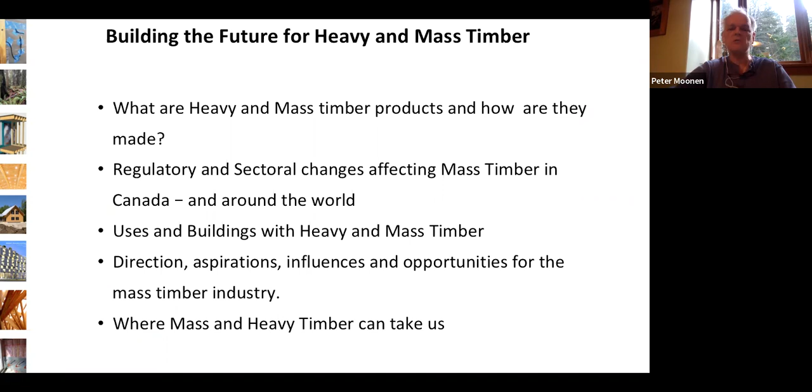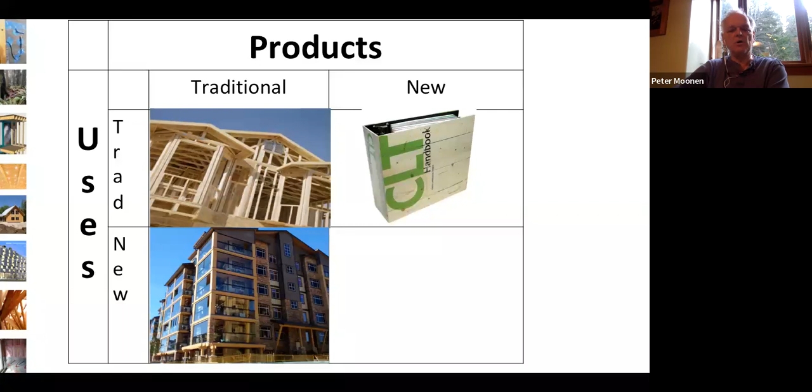Most of us are familiar with traditional wood products, the dimension lumber that goes into traditional uses like single-family homes. Those traditional products are also being used in new types of buildings, whether it's low-rise commercial or mid-rise construction up to six floors. But we also have new products that have come on the market, especially in the mass and heavy timber area, and these can be used in both traditional uses where light frame or concrete are typically used.

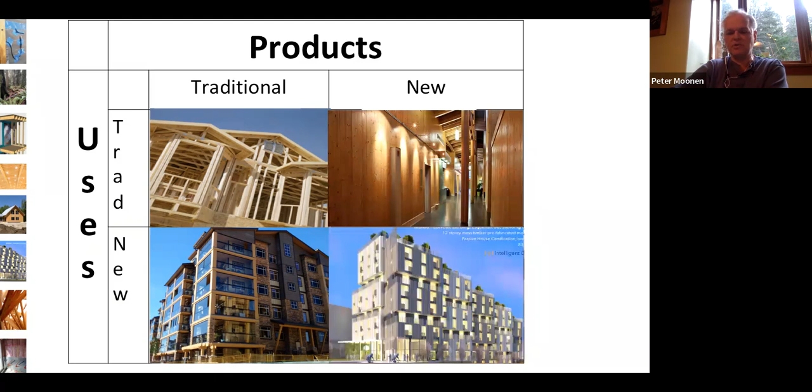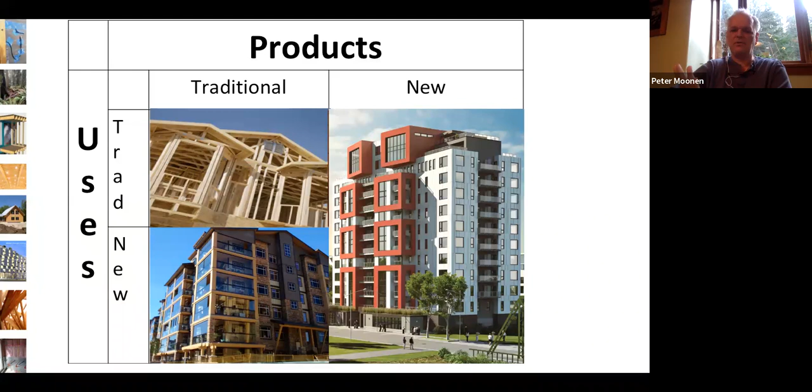Most of us are probably familiar with solid sawn timber or heavy timber. These buildings, we've got a hammer beam design in a cathedral in Europe, and then the projects on the right and left are construction in Vancouver. If you come out to Vancouver and go to Gastown Steamworks, you'll see a 9-story building, which is taller than the mid-rise buildings we typically build. It's heavy timber, solid Douglas fir columns and beams, and a nail laminated timber floor.

So sometimes people say we don't know how to build tall wood. I would argue that we know how to do it. We just forgot that we did.

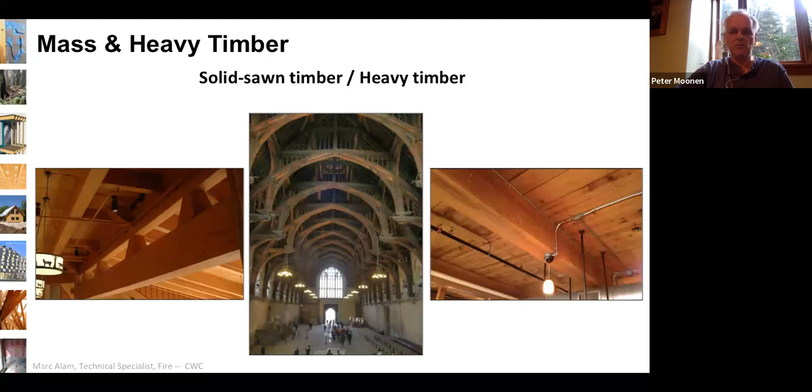So a little bit about different mass timber products. This is nail laminated timber, which was what I showed in the Steamworks photo. It's essentially dimension lumber that is held in place to adjacent pieces of wood using mechanical fasteners, in this case metal ones. We call them nails. It's an old style—I've seen it in ice houses in Illinois that were built in the 1800s. It's very, very strong. It can be used in a single orientation. It's generally supported on both ends. It's not really a good opportunity for cantilever in both directions like some other mass timber products.

Glue laminated timber is a heavy and mass timber product. I'm sure you're all familiar with that.

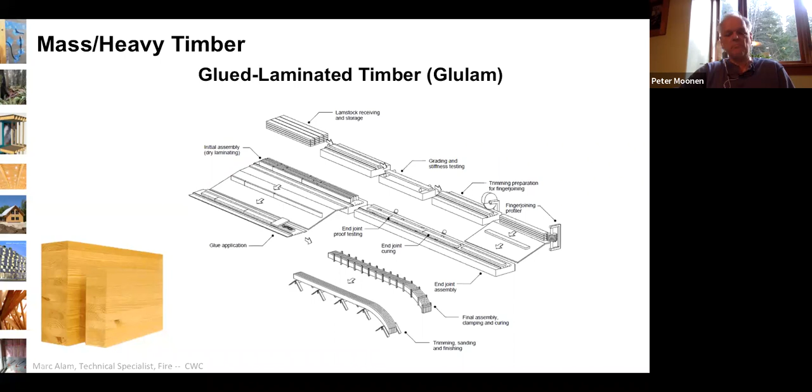One of the great advantages of this is that you can use less wood than with a heavy timber product, because the defects in a piece of wood are offset by the wood above or below. So you're basically trapping a defect among solid wood. This is a way to build up heavy timber elements and get better use out of smaller pieces of wood.

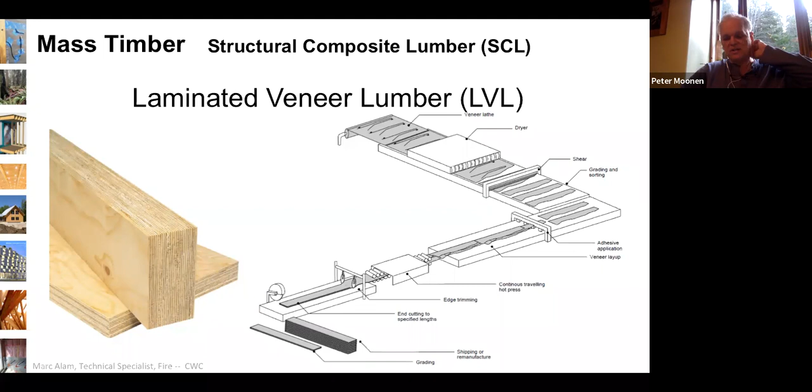Laminated veneer lumber is a single direction oriented veneer. The veneers are the same as are used in plywood, but they're oriented along the length, so the span is parallel to the orientation of the grain. In plywood, those same veneers and the same resin would be oriented at 90 degrees. Plywood is limited in its size because of that cross lamination of veneers. LVL is a continuous process, done in long, continuous billets.

Continuous billets are also the process typically for laminated strand lumber, where you take thin strips of wood, use a resin, and produce a long product.

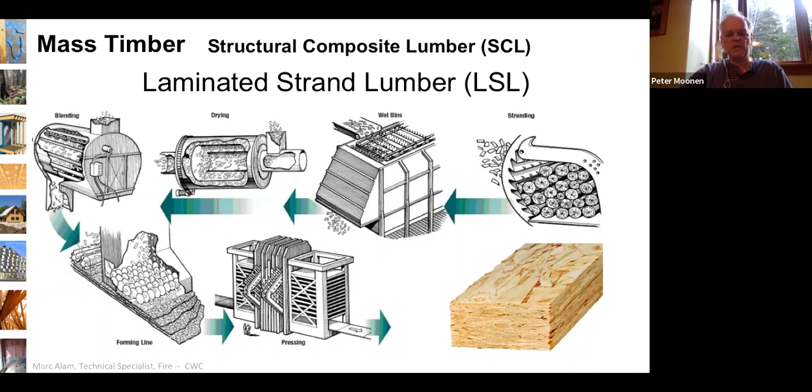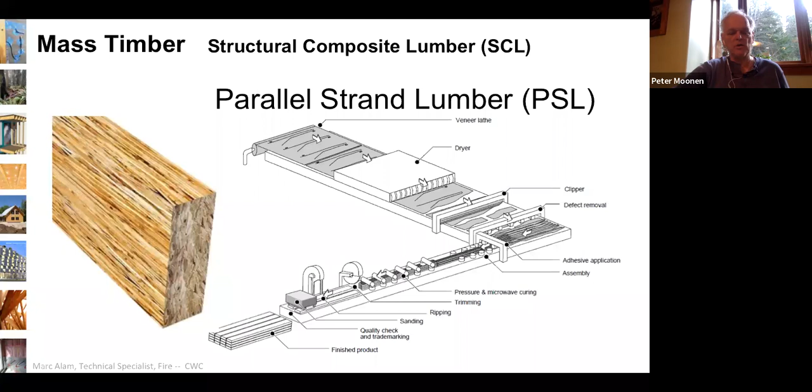Parallel strand lumber, known here in Canada as Parallam, was invented in Vancouver, and is the strongest engineered wood product that is commercially available. It takes the same thickness of strips as are used in plywood, and then uses a phenolic resin, and under pressure and heat it is extruded into a long billet, again a continuous process, but the billets are typically cut off at 64 feet and then remanufactured into smaller elements. This product can also be glued, as can LVL and LSL.

Cross-laminated timber is sort of the poster child for mass timber. It's a fairly simple product that can be versatile in size and thickness. It's just dimension lumber that is machined to have good glue surfaces, oriented at 90 degrees to the layer above or below it, and glued in place under pressure, sometimes with side pressure.

It's a really good slab product that can be used in shear applications in walls. It can be used to support gravity loads, and can also be used as a slab or as a floor. It is typically not used to replace light frame — it's used to displace other materials like concrete, precast or tilt-up concrete.

There are a couple of other fairly new products on the market. Dowel laminated timber is the same process as nail laminated timber, but it uses wood dowels, which allows that panel to be machined. There are two manufacturers in Canada, one in Golden, British Columbia, and one in Abbotsford. And when I say machined, if you want to create a window or door opening, you can just cut the piece out and not worry about the nails damaging your cutting edge.

The other, only made in the United States, is mass plywood panels. This is one of the strongest and most stable because it's using an engineered product, plywood, and then it's built up into large panels. This can be used like CLT, either as a horizontal slab or as a vertical gravity or shear support. So those are the typical mass and heavy timber products for which there are increasing opportunities.

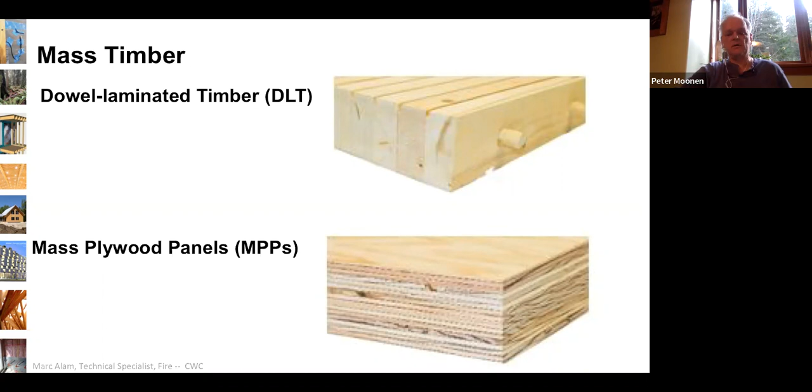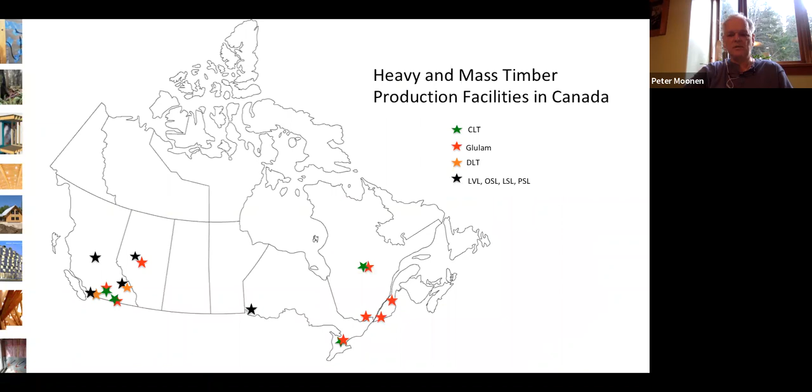So here's just a map showing some of the production facilities. There's very little in central Canada, but there's also very little market there. British Columbia and Quebec are growing. I would like to see a few — I'd like to put a few stars in the Maritimes, but that's an entirely different issue.

So there's lots of things happening in our design and construction world, and I'm going to talk a little bit about some of those. These are issues or opportunities for heavy and mass timber for which mass and heavy timber have solutions. We'll look at the topics I'll cover: regulations, the construction sector and some of the issues it's facing, wood product, housing, healthy buildings, and design for construction. I'll go through each of these, and I hope you'll start to see why they are interconnected.

But we'll start with the international aspect around carbon.

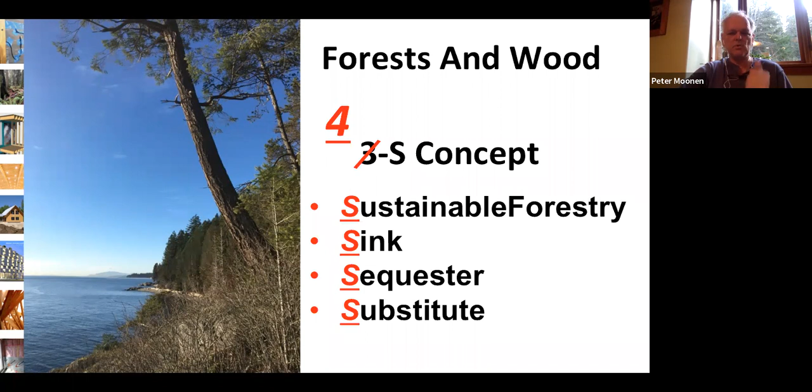Typically, when we talk about wood, we think of it from a 3S point of view: the forest is a carbon sink, wood can sequester carbon, and wood can substitute for more carbon intense products. But it actually needs to start with sustainable forestry, so that's the 4th S.

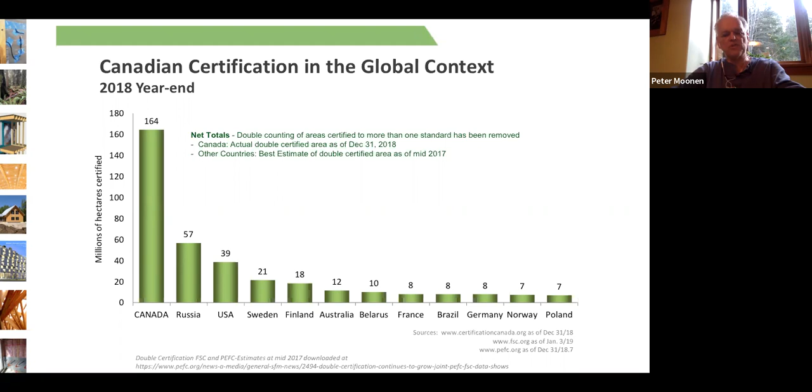The Canadian Forest Service has developed a carbon budget model, and they use that for reporting total emissions. Under COP15, COP21, and COP26, there were requirements for countries to report carbon emissions and carbon reductions. So in doing this, the Canadian Forest Service, in trying to calculate our forest emissions, has also looked at the best ways to reduce emissions and perhaps try to do some mitigation work.

You can see that there's no single solution. It's not just don't cut down trees, and it's not just cut them all down and use them in buildings. There's a mix that includes some bioenergy to displace fossil fuels. It doesn't do any good to use bioenergy to displace electrical grid electricity. Designing products that can last longer - that includes structures. Harvest a little less to have better utilization of that forest resource. But the best option was actually a bit of a mix of all of them.

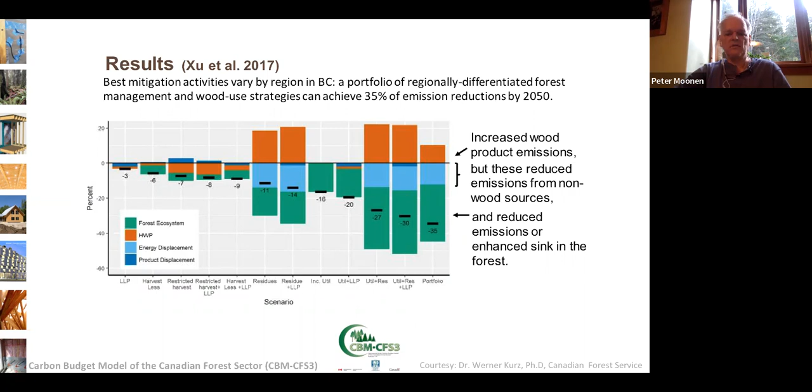This is a study that came out a couple of years ago. You'll find that the net benefit sometimes involves things that are counterintuitive, like having increased product emissions, but you also end up having various reductions in the total carbon impact of the forest in Canada.

So the federal government has a greening government policy. They were early adopters of the Pan-Canadian framework. The Net Zero Ready Energy Code is supposed to be coming out this year. British Columbia has procurement documents. There's international agreements around procurement, all of them to basically come up with a low carbon, sustainable, and climate resilient built environment.

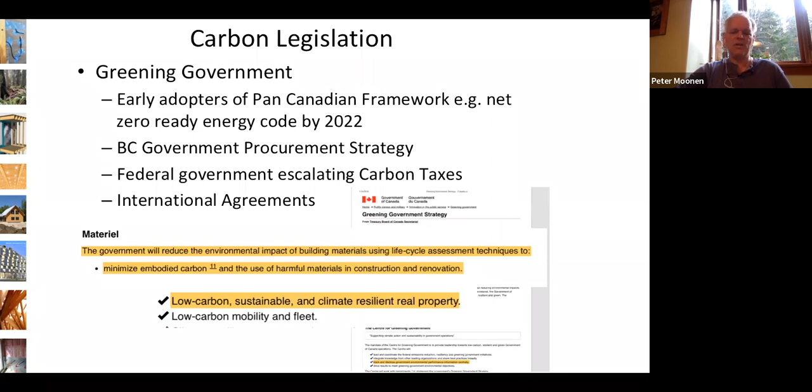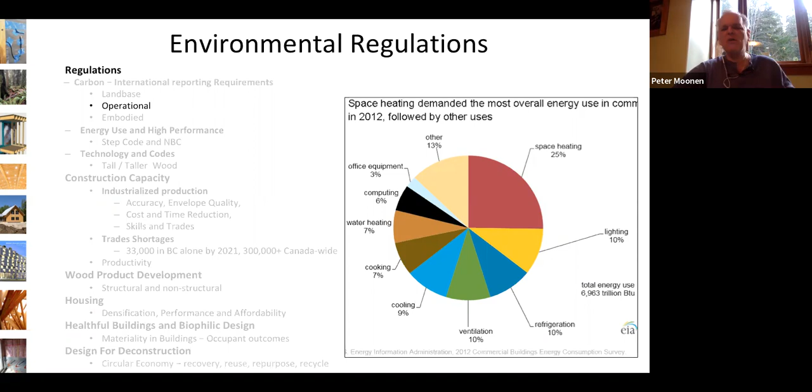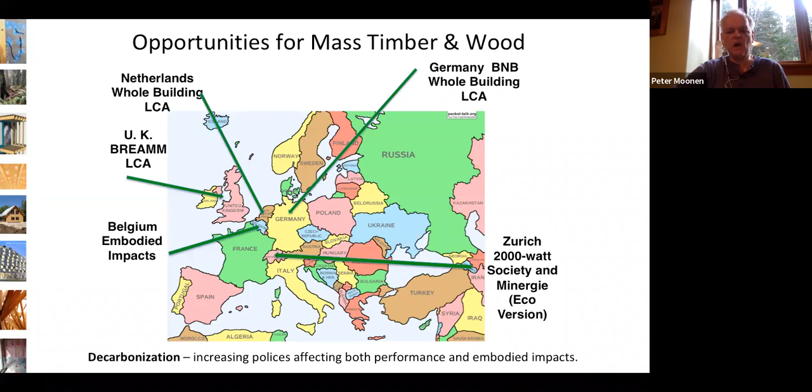Increasingly, though, we're seeing that the embodied impact of buildings is both having attention paid to it, but also being incorporated into regulations, especially in Europe, where most of the countries there have recognized that there is some impact from the embodied emissions associated with construction, and that we need to find ways to reduce that. One of the best ways to do this is life cycle analysis, evaluation of materials, whether whole building LCA or just focusing on embodied impact. But all of these are designed to decarbonize the built environment from both a performance and an embodied method.

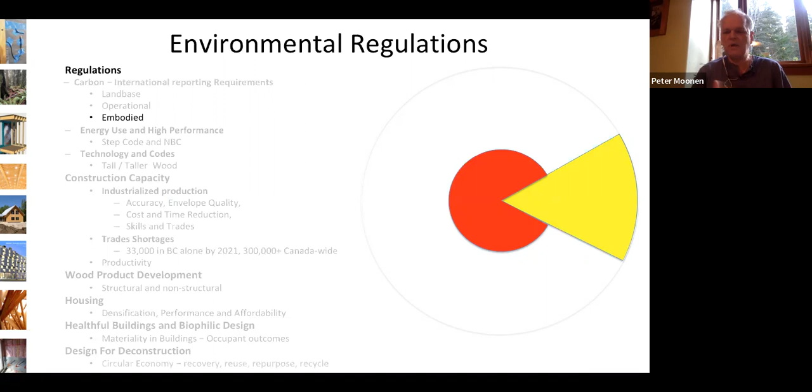Embodied impact is often undervalued, and I'll get into this a little bit down the road when we talk about high performance. But typically, embodied impacts are associated with the materials. When it comes to wood, there are several areas of opportunity.

But if we just have a conventional forest, a natural forest would have an increase in carbon, and then at some point, more carbon starts to emit from forests than is uptake. Forests are sort of like people - they start off small, they grow quickly, they get tall, and then they get big around the middle, and then they start to die. So while an old forest may have lots of wood there, it has also had lots of trees that have grown and died. So a forest reaches a stasis when it comes to carbon.

A way to increase that carbon benefit is to start having products that last a long time, typically buildings. So where the forest is a carbon sink, the buildings and the long lived products are sequestered carbon. But the big impact as well is in avoided emissions, by using, where you can, materials that are less impacting and displacing those that have a high impact. Now, I should say there's no such thing as a perfect material, and we need to understand the impacts of our materials and where we can merge them together.

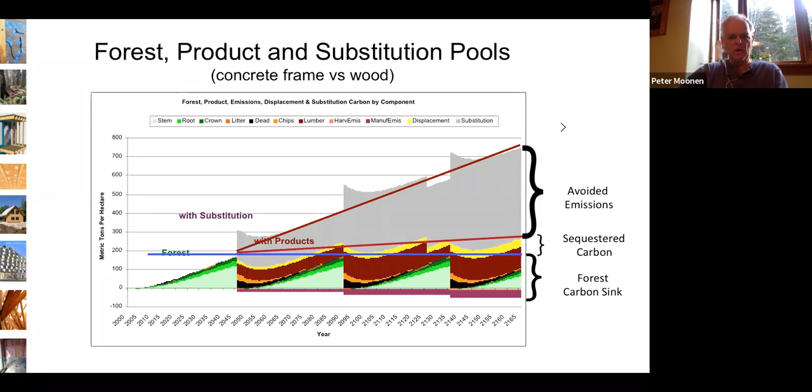As an architect or an engineer, I think it's your obligation to understand the impacts and the benefits and the uses of every material, and more importantly, how to integrate those. And if you do that, you have a much better opportunity to have low impact.

So getting back to operational LCA, I mentioned earlier that heating and cooling is about 25%. This LCA was done in Australia, and they found that the embodied carbon over the life cycle of the building was 35%. But when you look at this, you see that 24% of the impact over the life is in heating and cooling, and that is where we put our regulations. We don't have a lot of regulations around how much energy you can use for hot water, refrigeration, or cooking. So when you consider that what we regulate, the heating and cooling, is about two-thirds of the embodied impact in this particular LCA, it gives you some pause to think, well, maybe we do have to have some understanding of the embodied impact of our material and building design.

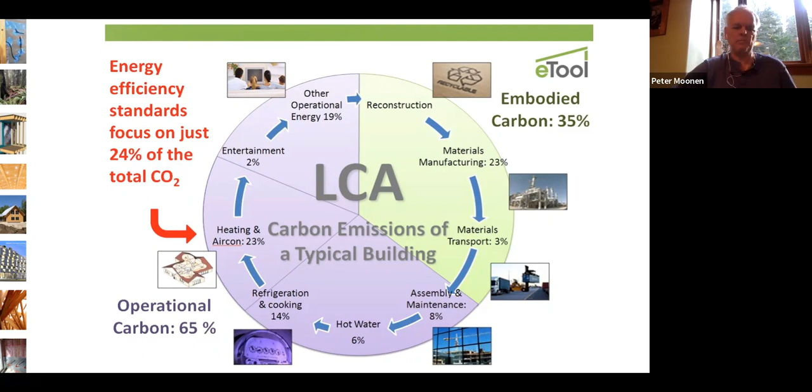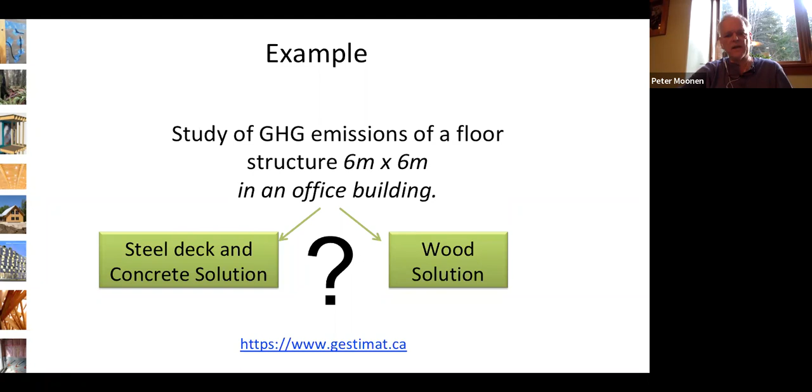There was a tool that was developed in Canada for the Quebec government to look at this. What are the impacts of our material choices in construction? The tool is called Gestimat. You can go to gestimat.ca. It's free, and it allows you to input your building design using a typical construction or even a material takeoff for the structural elements. It doesn't include the building envelope. It doesn't include the furnishings, the fixtures and stuff. But what it does look at is actual construction systems that are typically used in the built environment.

So for example, if you're looking at a typical steel, open web steel truss, steel deck, rebar, and concrete, the data from CIRAIG would give you, you would input the quantity of materials, the nature of the material. Is it 50 MPa? Is it 20 MPa concrete? And it tallies all that up and comes up with a kilogram of CO2 equivalent for each assembly. And then you total up all the assemblies you have in your building, and that gives you your base.

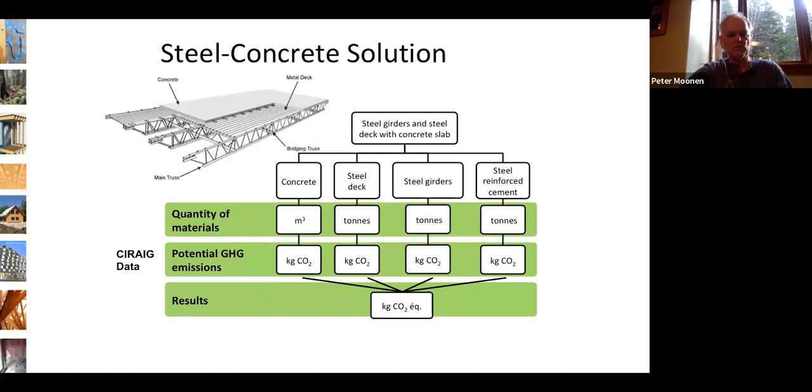This is not an LCA tool, it's an LCA compiler, with an emphasis on carbon. So that's something you can look at and say, oh, if I go with this system, or if I use these kinds of materials, if you're building, say, a 22-story building or a 2-story building, you can look at the different scenarios that you might consider, input that fairly straightforward, and then come up with an impact evaluation. And to be honest, if the systems that you're looking at are within plus or minus 2 or 3%, it's a wash. But if you look at one and go, wow, this system is 26% less than this system, maybe it helps you direct to the kind of choices or systems you can look at.

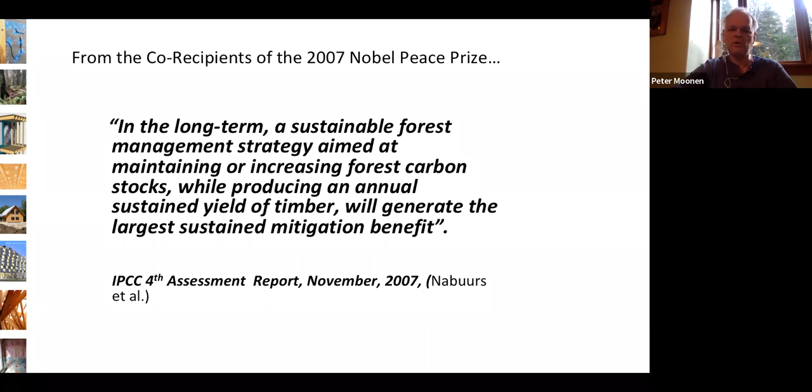Ultimately, when you combine embodied and longevity and forest, here's what the IPCC said, and has said 2 or 3 times now, in 2007, 13, and 19. Essentially, we have to grow more forest land. We have to increase the growth of plants on that forest land, and we have to use lumber from that increased forest, and that will generate the largest sustained mitigation benefit. This was not just in building materials. This is the way to have the largest sustained mitigation benefit that is controllable by man. We can't necessarily control what the ocean's carbon uptake is, but if we can increase our forest land base and use more sustainably harvested wood, we can start to mitigate that.

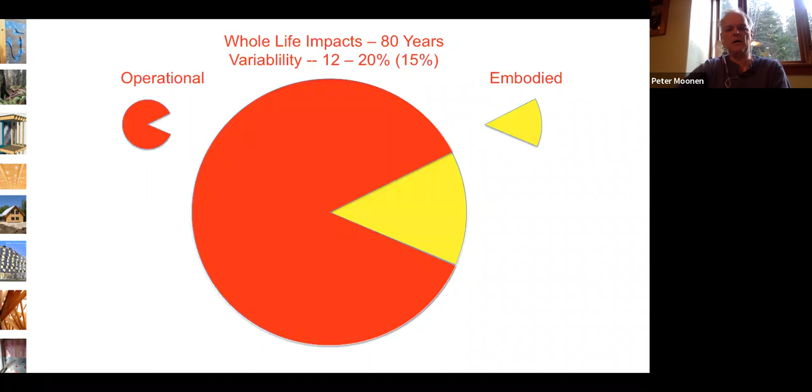So let's look at now the impact of performance and embodied. Typically, the embodied impact is between 12 and 20%. Those are the figures the U.S. Green Building Council has chosen or has determined. So in year 0, I've chosen 15% as a middle ground. In year 0, all of the impact associated with that building over its lifespan has been embedded. Those embedded or embodied impacts are done. Can't undo them, they're gone.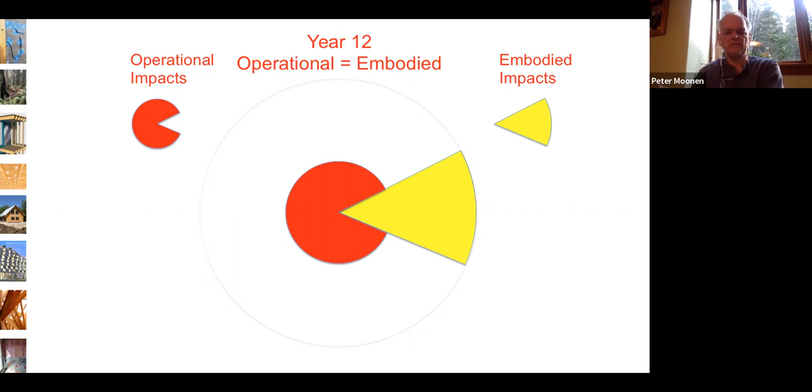Over time, as you add operational impacts, year 1, year 5, year 10, if you have an 80-year lifespan for your building, at year 12, the embodied impact and the operational impact for a building that has a 15% embodied impact are equal. And after that, the operational impact surpasses the embodied, clearly. However, we can't always predict what's going to happen in the future. You may have an exceptionally well-maintained and operated building, which reduces your operational impact. You may also have very poor operational performance. You may change, the land value may change.

You decide, hey, I got a 3-story building here and the land value went up. I can sell it and make a lot of money. The building may be perfectly good, but we don't need it anymore. We don't want it anymore.

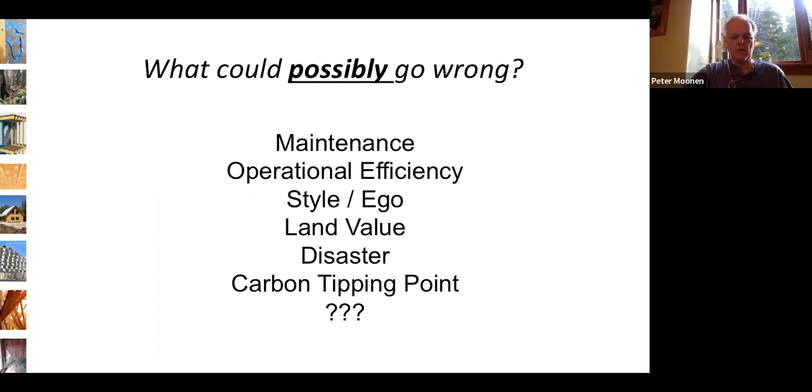So the future is unpredictable. That's why I think we have to pay attention to what we're doing today, because those impacts are definable and they're complete. We can't undo those.

In fact, some work done out of Quebec by Annie Levasseur has indicated that if we save a ton of carbon today, we don't have to save 4 tons going down the road in 80 years. So just like interest in a retirement plan, you hope that the savings you gather by putting in $100 a month or $300 a month will accrue so you have more money down the road than you put in. Carbon impact and carbon benefit accrue over time because the carbon dioxide in the atmosphere lasts a long time.

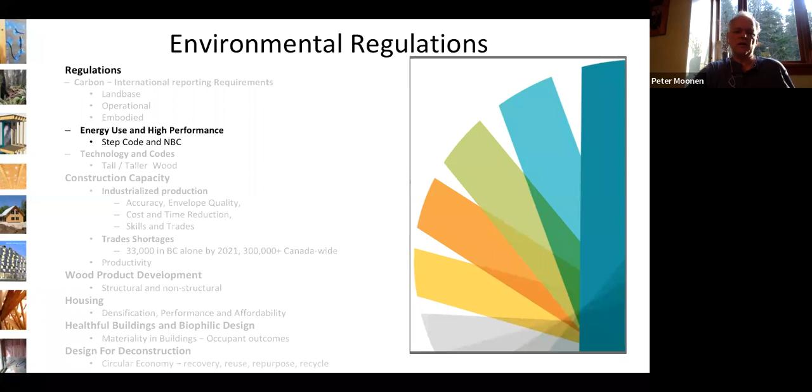So looking at energy use and high performance, this is a project—I actually have a completed photo that I neglected, I'm remiss in not putting in there. This is only a 3-story building on a 24-foot wide lot. It was built in North Vancouver. It's heavy timber, it's mass timber, and it's light frame. The front panels are all light frame, built to BC Passive House standards.

It is a passive house building, very low energy consumption. The back wall is CLT, and the floor plates are CLT, and you can see the beams are supported on columns. So it's heavy mass light frame, high performance building with a restaurant and a CLT fire separation.

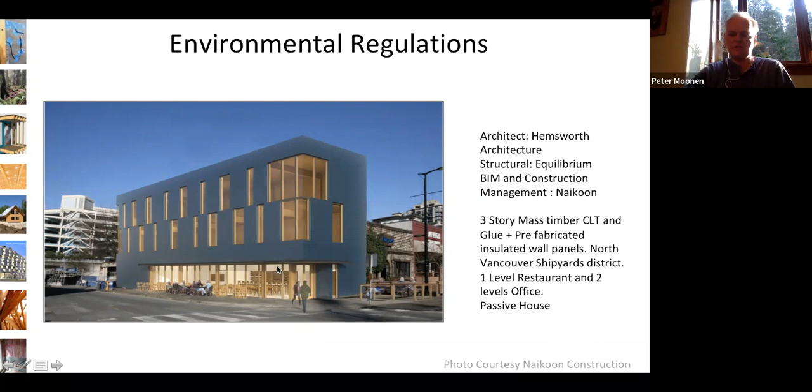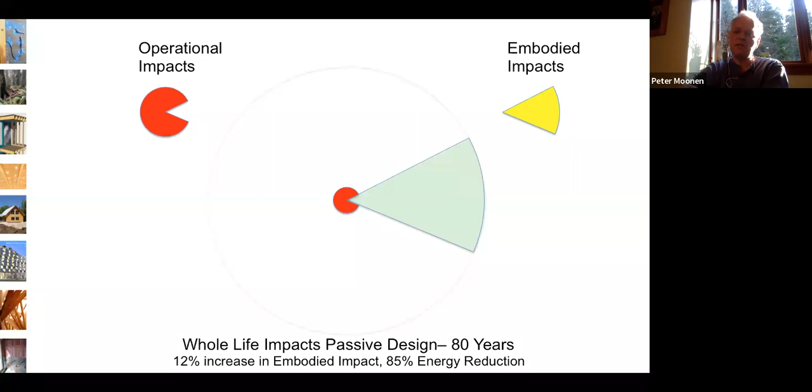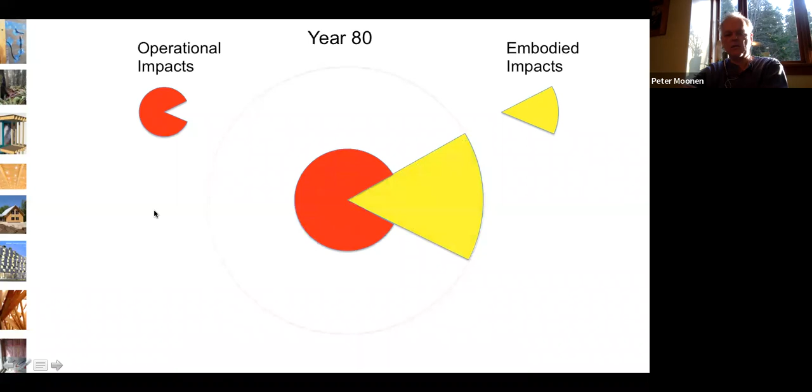But then you also have a much lower operational impact. So in year 1, year 5, you've got all of these impacts, year 30 and year 80. Over time, the embodied impact and the operational impact accumulate. But in this case, the embodied impact remains at 54% compared to 46% operational with high performance.

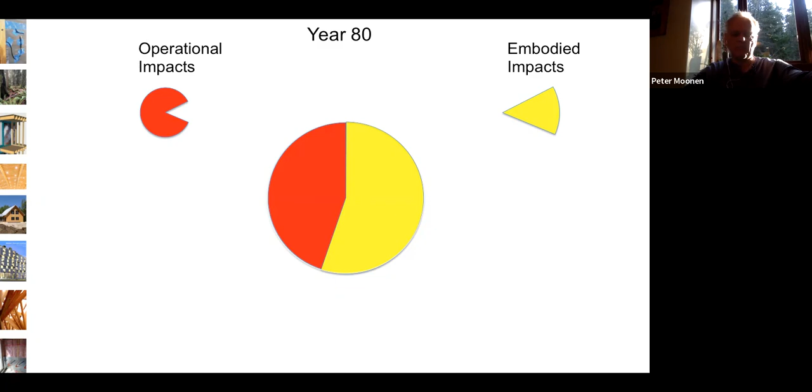So I think it's important to consider that we need to focus on both performance and embodied impact if we're really going to make a difference. And this is if the building had been a conventional performing building—it would have been about 3 times the impact total.

So other opportunities coming about are resulting from both technology and codes. As we increase our understanding of heavy and mass timber, I think we're able to better understand what the wood can do, what different systems can do.

Codes don't just change because you've got a lobby group that wants it to change. You have to demonstrate proficiency, capability, and competency. And that technology enabled a better understanding of what is possible for wood.

As a result, we're going to be seeing significant code changes, and provinces will adopt at their own pace. But the 2020 National Building Code is going to be a tremendous opportunity for those who want to use heavy mass timber. It will allow buildings up to 12 stories, with encapsulated mass timber construction, not exposed wood, adopted or adapted by each province. Quebec has different allowances for exposed wood than British Columbia does, for example. But look for the codes to change to allow mass timber.

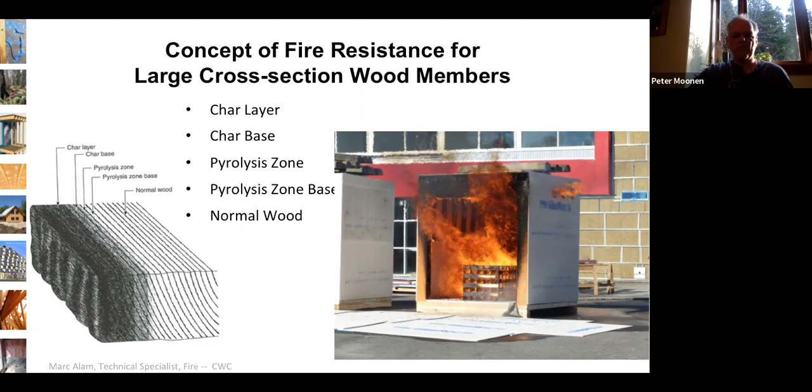That's what has to be calculated to allow for a 2-hour fire rate. It's how much wood do I need after 2 hours to support the structure.

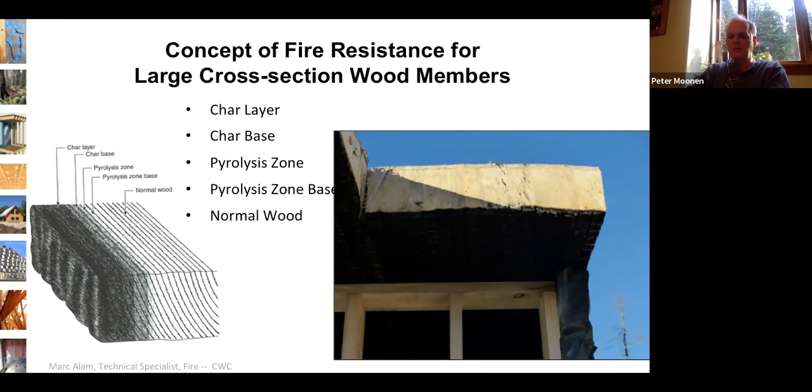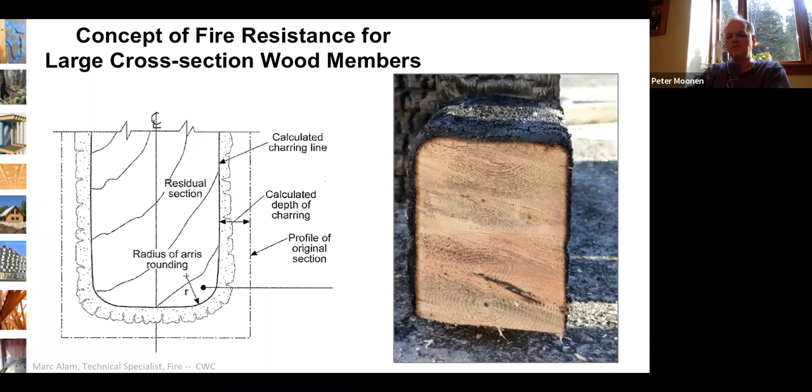This is a picture of a fire test that was done, demonstrated at the Surrey Fire Training Center. It's a heavy and mass timber, dowel laminated timber roof and heavy timber columns. You can see the dowel laminated timber had some charring, but most of the DLT remained solid. This is the glulam column that was burned - it had about 5/8 of charring after an hour and 15 minutes of fairly intense fire.

So the codes are going to be based on demonstration of performance capabilities. So we're going to shift gear now and look a little bit at construction.

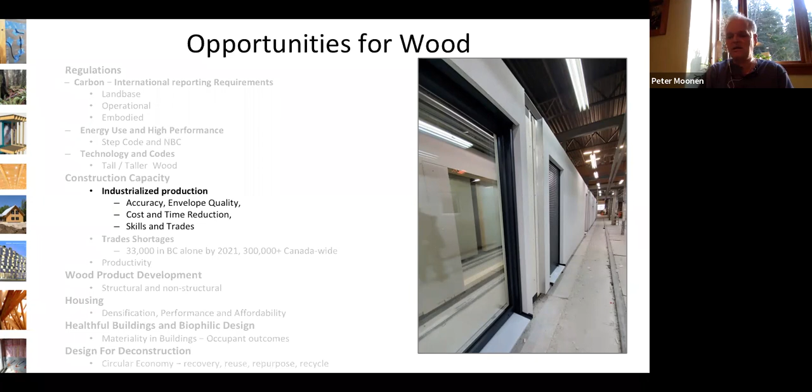These panels on the right are from a company called Elk Fertighaus in Austria. They are light frame panels that are completely prefabricated and shipped vertically. They include windows, doors, electrical, some mechanical ventilation, cladding on the outside, gyprock, and even paint on the inside.

This is a passive house building in Whistler. It was a heavy and mass timber building. It went up in a couple of weeks. It was a 3-story building that was supposed to be insulated concrete, but the concrete could not be poured and cured because of the timing. It was in winter, and the owner needed this operational by May.

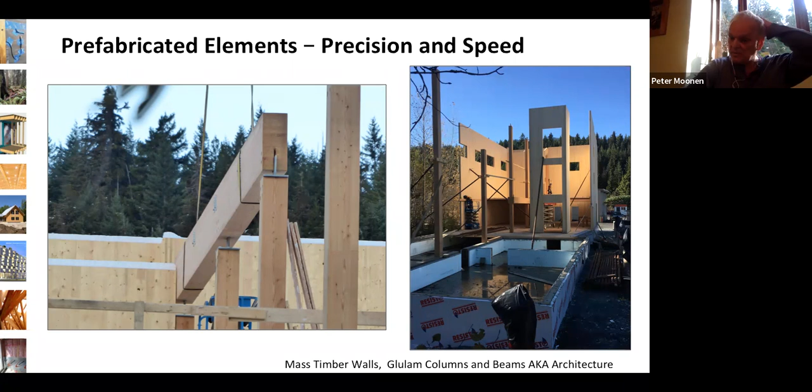Whistler is a cold place in the winter - lots of snow, as you can see. This was in late October, and the building went up in 3 weeks and was all prefabricated components.

One of the other things we're dealing with respect to construction capacity is a shortage of trades. Most of you probably know Mike Holmes, but there is a real shortage of qualified trades in our construction sector. In British Columbia alone, 33,000 trades jobs are going wanting. And that includes everything from formwork, rebar, electrical, plumbing, mechanical, envelope, you name it. There are trade shortages, and it's not just in BC, it's everywhere.

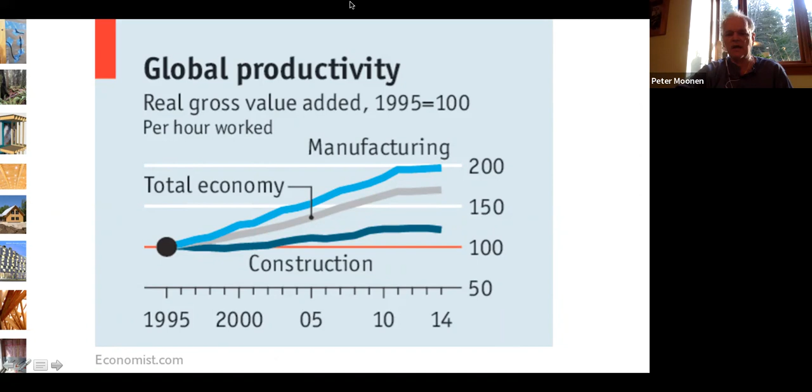That affects productivity. But productivity in the industry has been fairly low over the last 75 or 80 years. You can see this chart just shows the lack of productivity that has plagued the construction sector. It's not pleasant for them. You look at the gross value added per hour worked, which is another measure of productivity - it's fairly low. Even in some countries, agriculture surpasses the productivity of the construction sector.

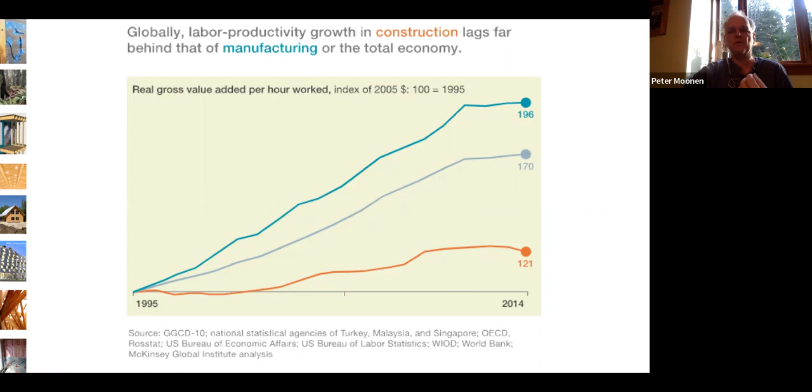So what is this leading to? It means that companies have to become more productive, and that is going to mean off-site construction. It's going to mean prefabricated elements. It's going to mean well-trained trades, understanding how to do their job within the confines of a prefabricated system.

That doesn't mean prefabrication has to be boring. Lots of things are prefabricated. What's the analogy that was used at a prefab session that we had here in British Columbia about 3 weeks ago - you'd never buy a car by having all the parts show up in your driveway and have to assemble it yourself. So buildings are complex systems.

Quite often, though, a lot of buildings, especially in the single-family home sector, the raw material shows up, you have to piece it together on site and figure out what to do with whatever you couldn't use. That is going to be changing as we have fewer trades who can do that. So we're going to be moving to prefabrication - mass timber, heavy timber, really, really well suited in those areas.

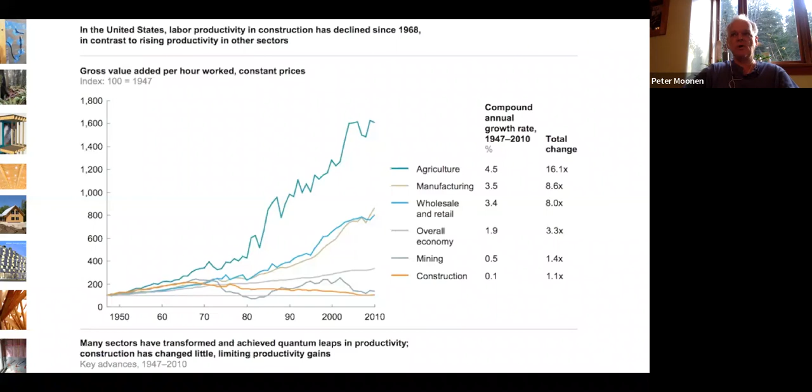So why is prefabrication an important and good opportunity for wood? We have changes in technology and development. We've got new resins, we've got new software. BIM is something which is just becoming a natural part of your world. The wood sector has embraced that as well.

We've got direct to machine technologies so that the engineer can transfer the information directly to the machining tool. In this case, this is a CNC machine that is going to be processing a CLT panel. This all increases productivity. It also increases accuracy and installation ease.

You can imagine that pieces that are really well cut and well designed are able to go together to create strong, tight, and well-performing structural systems. Wood is very well attuned to being processed to very tight tolerances, to a fraction of a millimeter. Other materials are either difficult to machine or can't be machined to those tolerances. This is why it's important to understand what you need in the building and what a particular material can deliver.

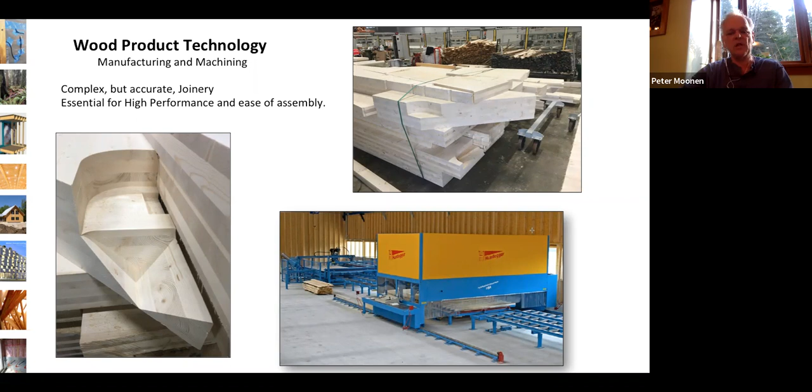The precision and the requirement for precision, and the ability to deliver that, is a real opportunity for heavy and mass timber, especially as we get to bigger buildings, whether taller, larger span, or higher performing buildings where the wood acts in a thermal capacity, reducing the amount of insulation. These are all opportunities for heavy and mass timber.

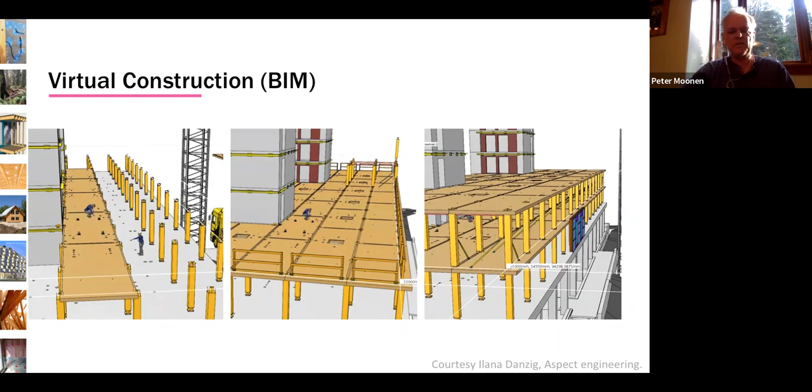I managed to get some shots. This was some of the virtual drawings from the Brock Commons project. Every single structural component, every piece of rebar, every bolt was input into the software, and then the building was virtually built. They did it several times just to see what the best placement of crane positions and people was, and what the order or sequencing of installation should be. All of those details were worked out before the building was even started, and that's a real opportunity. This software enhances the ability to use wood.

I'm not sure how it is where you live, but increasingly cities are getting denser. In some cities like Vancouver, the city is constrained on 3 sides by water and 1 side by another municipality. They have no more land, so if they're going to densify, they have to go up. At the same time, there are expectations on performance imposed by the province and the city, and there's a real demand for affordability. How are we going to do all of that?

The Vancouver Affordable Housing Agency is looking increasingly at wood because of its speed of construction, and also because there's a sweet spot where it is competitive, or more competitive, than concrete, depending on the nature of the design. They're increasingly looking at it as a solution.

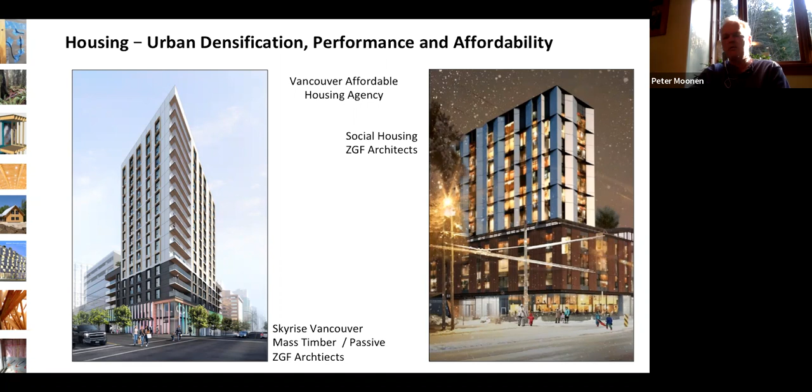The building on the right is probably taller than currently allowed under the codes, because it's on a concrete platform with 12 stories on top of that. But that building could be an all mass timber building, and that would incorporate social and affordable housing, as well as commercial and mercantile uses.

What are some of the typical uses? In mid-rise construction, it's not uncommon for mass timber elements to be used in the elevator shaft. It reduces the differential shrinkage between two different materials like concrete and wood. It also has good fire resistance capabilities. It can be pre-manufactured and dropped into place, or it can be site built, so it's very versatile. On the right-hand side is a CLT elevator shaft, I believe this was in the Crest building in North Vancouver, and was 3 stories high, built as a box and dropped into place with a crane.

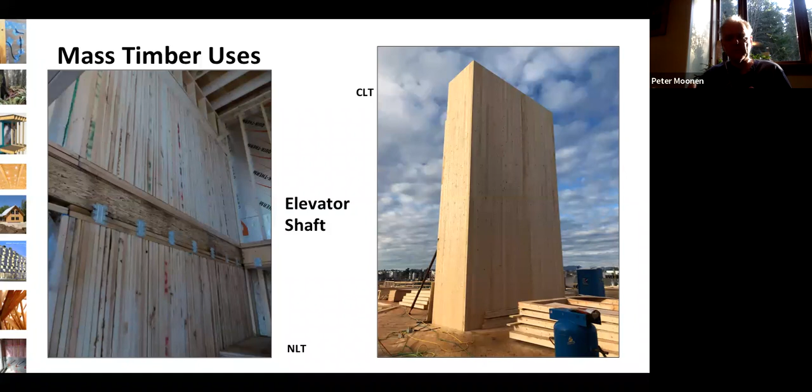Heavy and mass timber can also be used in hybrid construction. Several projects now are moving to use light frame construction for the vertical elements, the prefabricated walls, on which they drop a 4 meter or 3.5 meter by 10 or 12 meter long mass timber element that only needs to be screwed into those vertical elements. It gives you immediate floor space for people. It's a lot less cumbersome than having 2 people install joist hangers and then joists followed by plywood and construction adhesive. It's a very efficient way to get the building up, and this is especially valuable on commercial projects which are going to be sold or generating revenue.

Now, wood also merges well with other materials. Several engineering firms have found that they can increase the speed of construction and reduce costs by incorporating steel posts or steel beams, depending on the span that they require. Perhaps steel is a better option. I think the important thing, this again reinforces that you need to understand what materials can do and what they can't or shouldn't do.

There's only one building in Canada that is a single material, and that's an igloo. Every other building has to merge materials. So it's your job as designers and contractors to understand what can be used here and what should be used here.

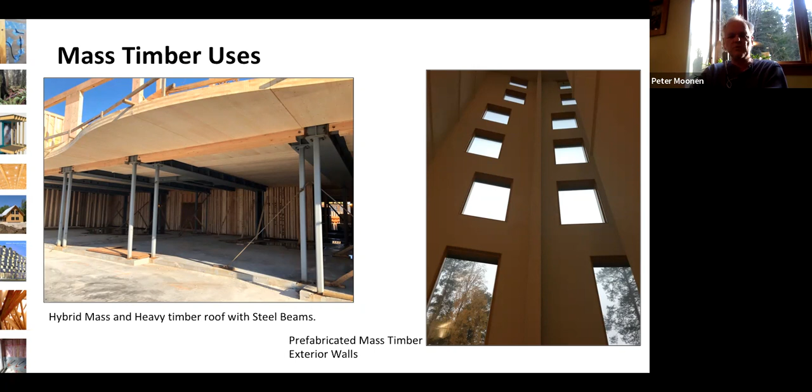The building on the right was a 9-story mass timber building in a place in Finland—I'm not even going to try to pronounce it, I think it's Puukuokka or something—but it was all prefabricated. Long elements were produced, and it's this building here. It's 3 stories, 3 or 4 stories down the back, depending. There were a series of 4 or 5 buildings.

What was interesting about this building, it's a passive house building, but it also has balconies. How did they get rid of that thermal bridge? These boxes here—1, 2, and 3-story boxes—were prefabricated with the windows and balcony elements installed and dropped into place using the dovetail sliding connections like Pitzl or Simpson has, or Sherpa connectors. That's where the prefabrication capability of wood, the precision, is so important, because there's no tolerance for error when you're dropping in a 1, 2, or 3-story balcony onto a system. It has to be exact placement.

But they do it quite regularly. This is, as I say, one of 6 buildings in this complex—high performing, beautiful structure inside, and everything was prefabricated.

Mass timber can also be used externally, but strategically. It should not be exposed to weather directly or standing water, but it can be used, as this was an overhang that was then cladded and protected from water to give a nice soffit look.

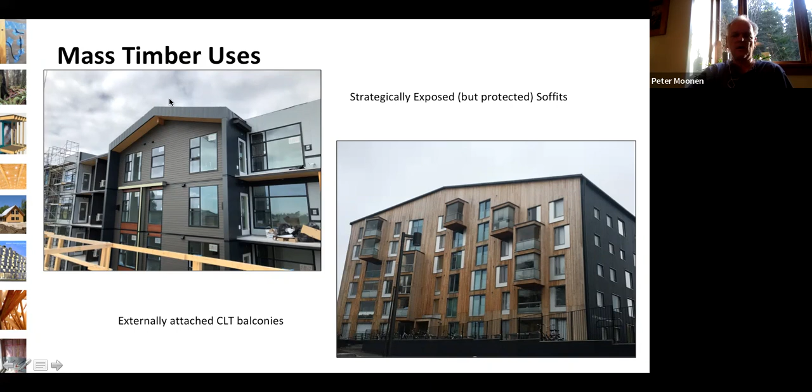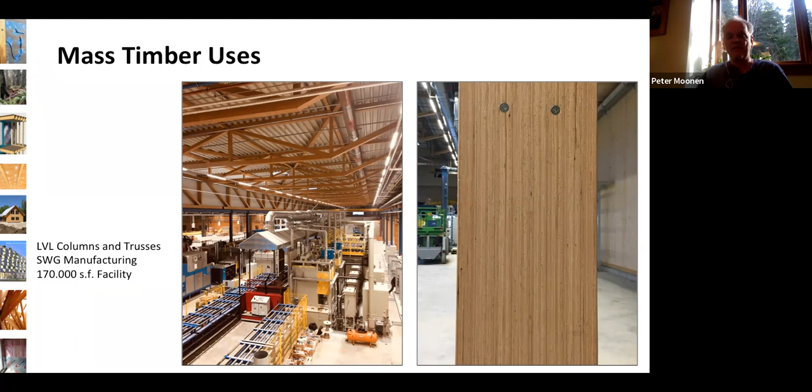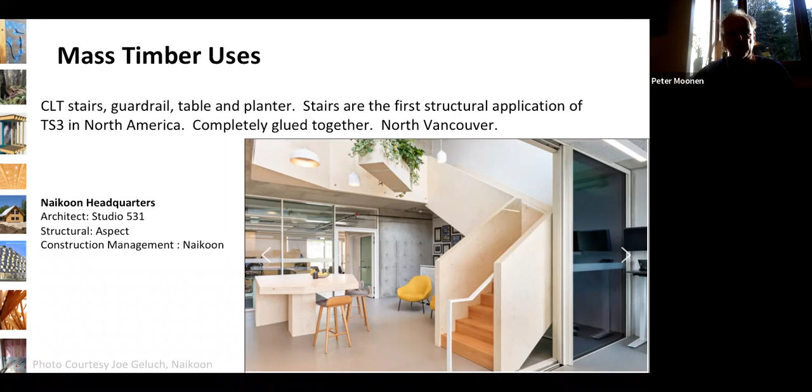We'll be producing a case study on that building in the next little while, following it. We're having a workshop on that as well in January, which I think is going to be available if you're interested in that kind of construction, a 3 or 4-story mass timber building. I will send Vinny the link to that workshop in case it is virtual. Naikoon has really embraced mass timber, and they're using it throughout their projects.

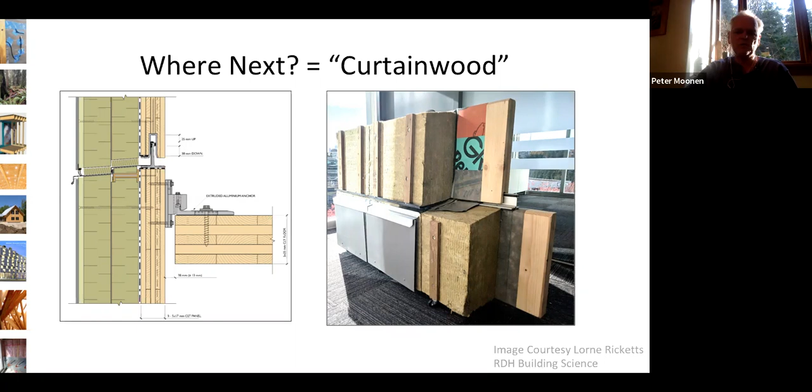So what's next for mass timber? Well, increasingly we're seeing uses which are not purely structural. I just throw this up—Curtainwood. It was a curtain wall system that was proposed for a tall building in Vancouver, which I'll get to. It's really using mass timber to provide the fire resistance of an external curtain wall in a tall building.

Here you can see this is how it could be attached, similar to the steel curtain walls that were used at Brock Commons. But the question was asked, can we do this in mass timber? Can we do this in light frame? A group got together to propose this, and they're examining how we can build mass timber systems that can be used as curtain walls.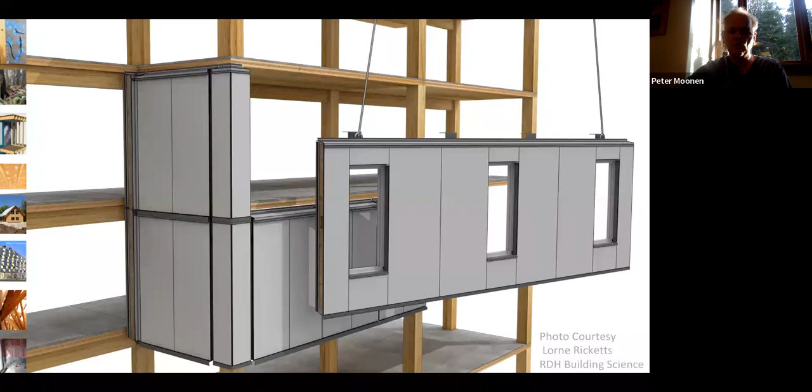And these curtain walls can be high performance—they're airtight, watertight, and they can be applied to a building of any material: wood, steel, or concrete. So, healthy buildings.

Increasingly, we're seeing there is evidence around stress reduction, parasympathetic and sympathetic nerves responding to the environment which we're in. If any of you are familiar with Tye Farrow, I would urge you to go to his website called causehealth.org. He's just finished a Master's of Neuroscience in Architecture, who knew, at the University of Venice.

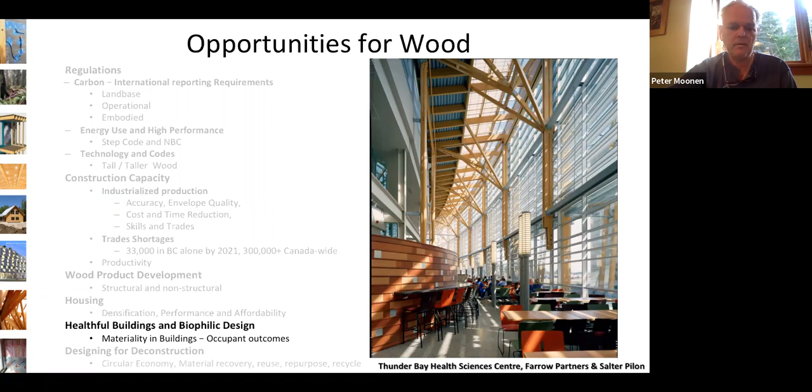He realizes that buildings affect us, whether we're aware of it or not. The building is going to enhance our health and well-being and reduce our stress levels, or it's going to increase it. Sort of like driving uphill without brakes, you're either going forward or going backward. But we're seeing all sorts of benefits coming from exposure to natural material, natural light, water, plants, and the surfaces of the structure. Stone, wood, brick - those all have stress reduction benefits to us, to our health.

There's a couple of projects which have come out that talk about this. Materials Matter - you can get this online, downloadable from naturallywood.com. Take a look at it because it reviews some of the studies that were done around health benefits of exposed materials, and makes some suggestions as to opportunities. People like wood. It's not a perfect material, but it's a darn good material if we understand how and when it can be used and why.

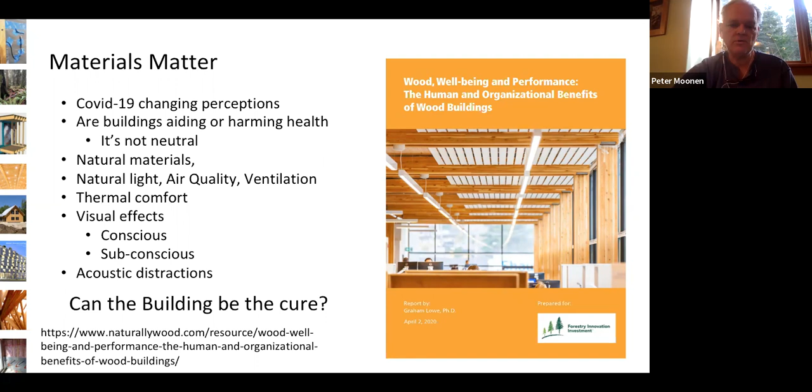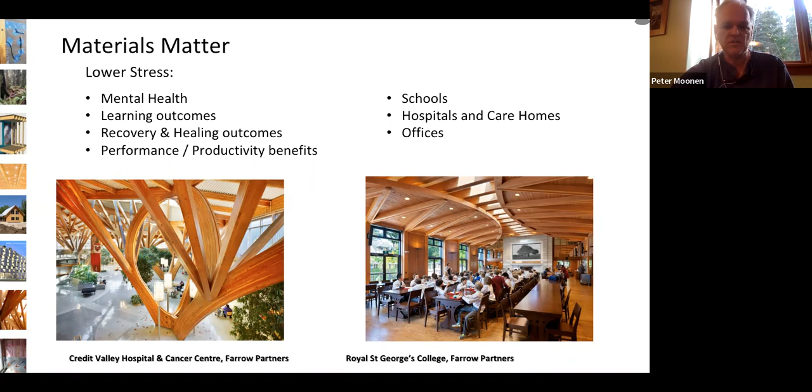Tye has used it for, I guess, Credit Valley - it's almost 15 years old. This is a public area, Credit Valley Hospital and Cancer Center. He's used it in schools. We typically see wood exposed in schools because there have been increases in grade point average in the United States. Studies have shown natural light and wood increase the grade point average of students, by reducing their stress level. Their body is focusing on learning, not on dealing with the external stress, be it acoustic or light or temperature or moisture.

Finally, designing for deconstruction. I think there's probably none of you in the room that would not understand what designing for deconstruction or circular economy means. But it's a tremendous opportunity for wood because wood materials are generally fastened mechanically. They're not welded, they're not cured. Yes, there are glues, but with heavy and mass timber, you can recover not just the material, you can recover the function. No one's going to take CLT and turn it back into lumber, but they can use a CLT wall as a wall.

Now, there are some guidelines and standards that have been or are being developed for deconstructibility, for disassembly, and increasingly looking at circular economy. Start to explore that and start thinking, how do we design this building so that we can take it apart and use it somewhere else when the land value goes up and someone wants to sell the land, but the building is perfectly usable? There is a conflict between designing for durability and longevity and not recognizing the economics that happen to our land, especially in urban areas. So if we can design those buildings so they can be removed, a 3-story office, maybe move it to an outlying suburban area, and recapture that function.

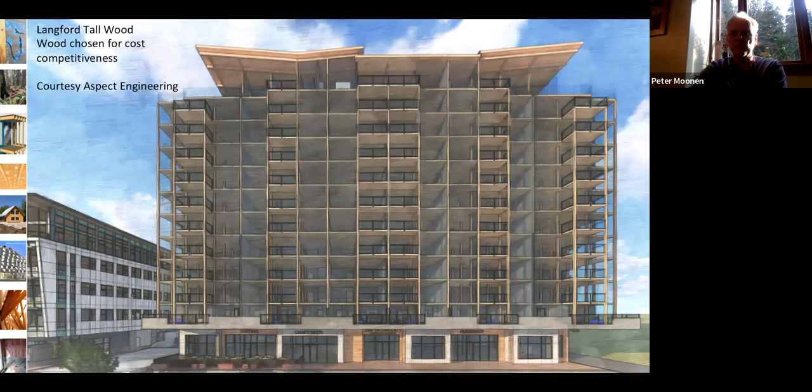So where can mass timber take us? This is a 12-story building in Langford, British Columbia. I was on the roof of this building about a month and a half ago, 2 months ago. They're just putting the final elements. It's an all mass timber building, but they have steel components where they need extra shear. This is the penthouse apartments, but they chose it because it was cost effective.

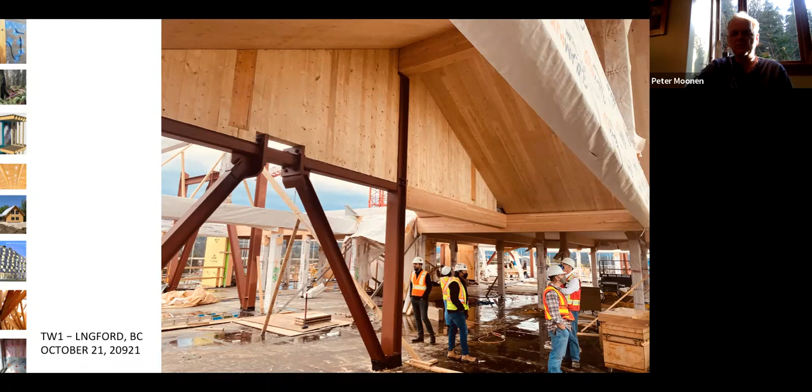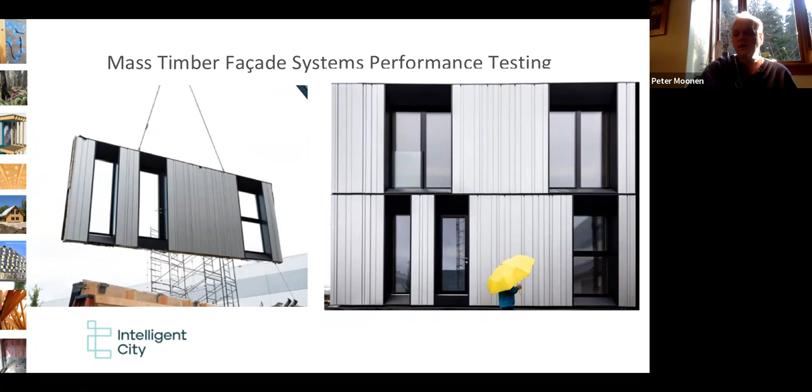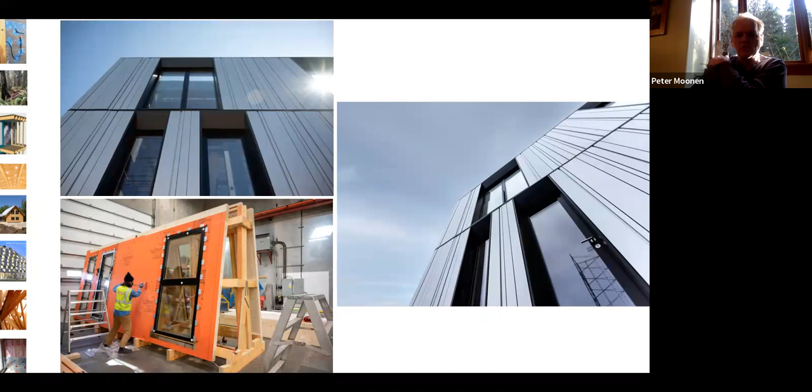This is a fabrication system that has been developed for some projects by BC Housing and Vancouver Housing Authority. The company is called Intelligent City. They take mass timber and have a robotic system where all of the components - windows, cladding, mechanical connections - are installed using a roboticized system. They've got 3 robot staging areas and an assembly area. This is a metal clad building, but it's a passive house, and it's pretty cost effective, especially for buildings built in the inner area or infill, where you don't have staging areas where you can do a lot of work on site.

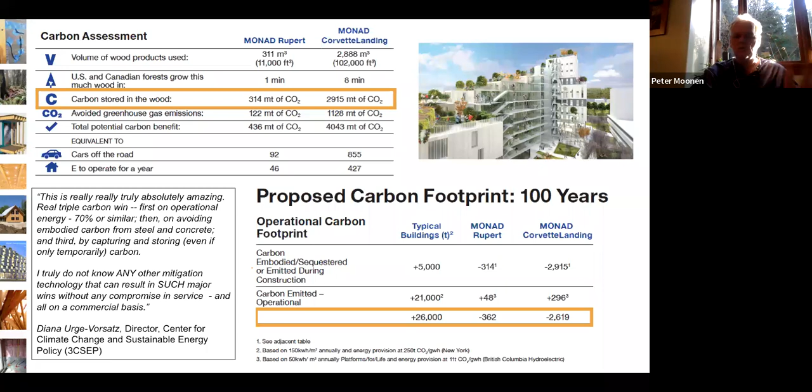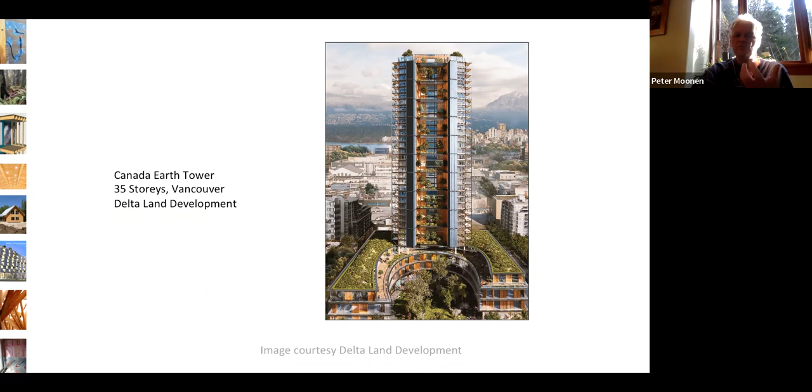So finally, this is the Canada Earth Tower. It was for this building that the curtain wood systems were developed. It's a mass timber structural system with a concrete and steel elevator core, combining the materials to take advantage of their strengths and acknowledging their weaknesses.

As far as designing for durability, wood is often targeted as, oh, it rots, it burns, it's weak. Well, it can be those things if it's not well designed, and if people don't understand the material.

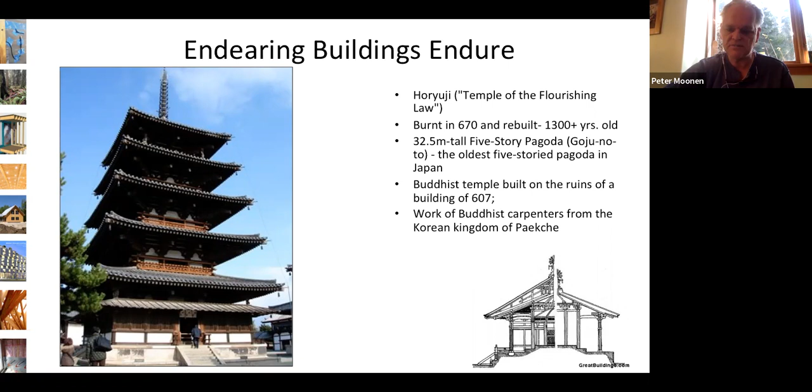So several years ago, I was asked, why would I build with wood? And I think the question really shouldn't be why would I build with wood. Here's all of the benefits of wood.

It's a carbon sink. It's renewable, recyclable. The forests clean the air, clean the water, provide O2. It avoids carbon. It's strong, lightweight, flexible, diverse, inexpensive, and ubiquitous. So the question perhaps should not be why would I build with wood, but if I'm going to build, if I'm not going to use wood, what am I going to use?

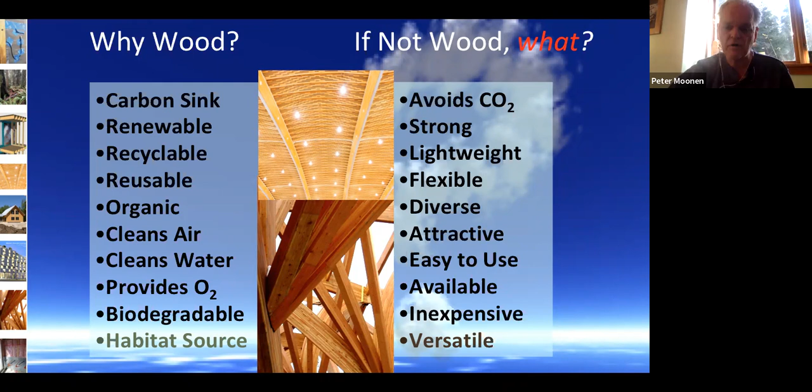So think about where heavy and mass timber can be used. It's got new opportunities, it provides new benefits, it has great versatility, and it requires that you learn a bit. It's not light frame construction, it's not tilt up, it's not precast. It's a different material that requires different skills and different understanding. But it is a way for our future construction to really make a difference.